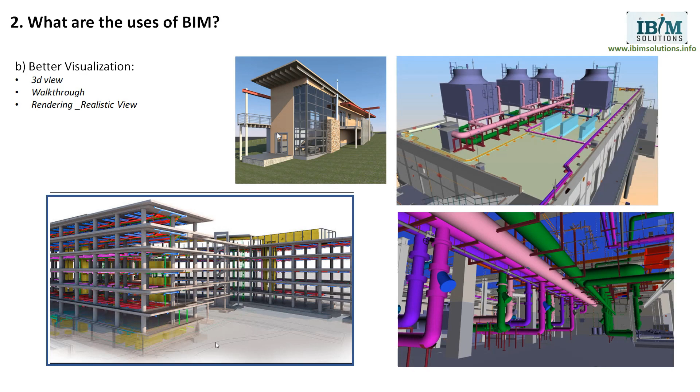We can have a walkthrough through the building to understand how it is constructed, how the equipment is placed there, if any changes are needed. A lot of things can be done with the 3D view. It is always better for us to have a visual impact.

I hope I am audible. I'm getting some voice from the background. I request all members to keep mute. Okay. Team, can you mute all members, or do I need to do that? I'm getting some voice from the background. Okay, fine. So thank you.

Rendering is another feature by which it is easy for us to understand how the building looks. It is good for marketing purposes. We can have a rendering with a much more realistic view. So that is also one of the usages.

We can see here how visualized it is for us, to have a visual impact and to go through this building before it is really constructed. So that gives a feeling of the virtual impact of BIM in the construction industry.

The other prominent use is clash detection. It is mainly a great use for general contractors. Before, we made drawings on a 2D platform, and if we made that a coordination drawing, there was a big chance it might not work on site, because there was no other tool to confirm it is a coordinated file. But since the emergence of BIM, we can use software like Navisworks, where we can detect the clashes.

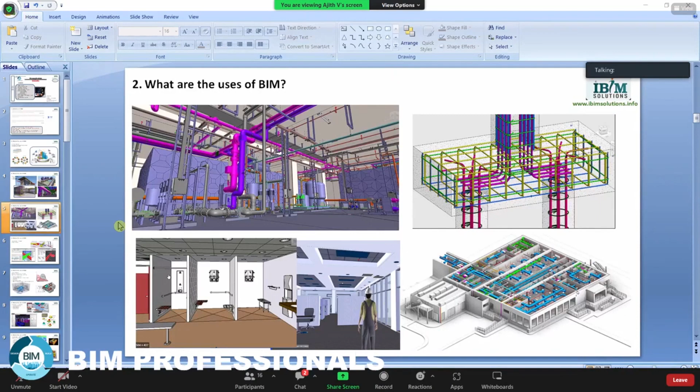So I was talking about clash detection and its advantages. We can detect clashes between a duct and a beam or anything by using software like Navisworks.

Hisham, I'm getting some information like admit. Can I admit members from my end, or will I lose the sharing option? Okay, let me admit, because I'm afraid of losing my screen share. Is my screen shared now? Yes, sir. Fine, no problem. All right, I'll admit members to join, and I think the screen is shared.

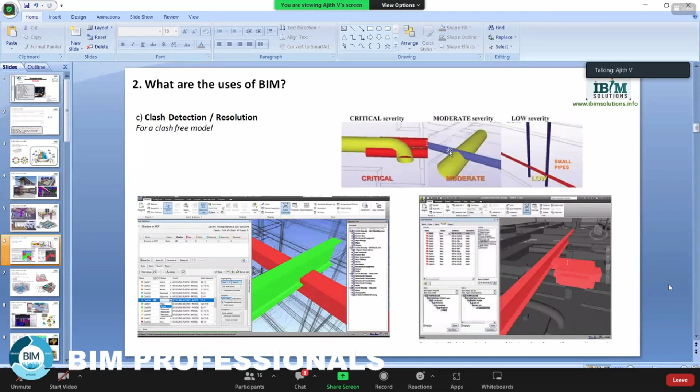Okay, fine. So clash detection is a big advantage for general contractors. They can have a report, they can have a meeting to understand the severity of the clashes, whether critical, moderate, or low, and we can arrive at a solution. That makes the coordination process much easier.

The other use is better productivity. Since BIM is a centralized platform, it relies on the concept of a single source of truth for all building information. The same data we generate for floor plans, we generate for elevations, sections, scheduling and all. They are not different files.

For example, if you remove a door from a building, it will immediately be removed from the relevant floor plans, sections, schedules and all. If you change the design, it will reflect on all the drawings automatically. That is the bidirectional function of BIM. Before, in the CAD process, these files were all different, with no relationship between them. But since the emergence of BIM, it is easy for us, and we can rely on the information.

Because of that, there are fewer RFIs and change orders, because people can have an effective view of the building. And as I mentioned, sections, quantity takeoff, drawings and all are synced. It is the same file. It is cost effective, time effective, and much more reliable information. So it ultimately makes for better productivity.

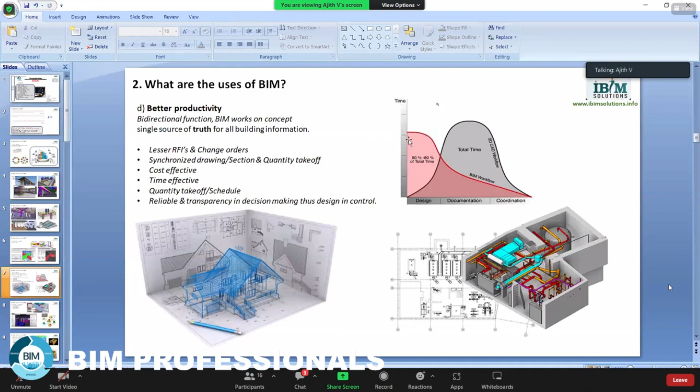For operation and maintenance, it is very good for facility management. They can do good maintenance management, space management, energy management, and COBie incorporation. For those who don't know, COBie stands for Construction Operations Building Information Exchange, which is much needed for facility management. So this information is added to the components.

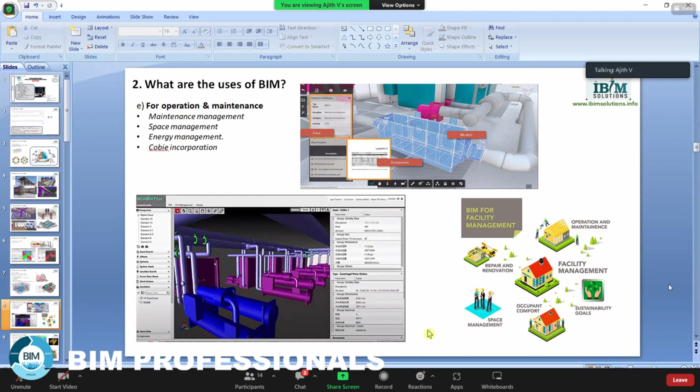So there is a link to information like warranty, manufacturer, and such information which is needed for facility managers. That can be taken from the data. So that makes a facility manager's job much easier. It can be used for space management and all.

For designers, it's a great help because they can get the data from the BIM and analyze it for an energy efficient building, to make a building energy efficient, and for effective usage of material. It gives them more transparency in getting the information, design control with reliable information, energy efficient building, low cost, effective material usage, green building analysis. It helps them do green building analysis for getting a LEED certificate.

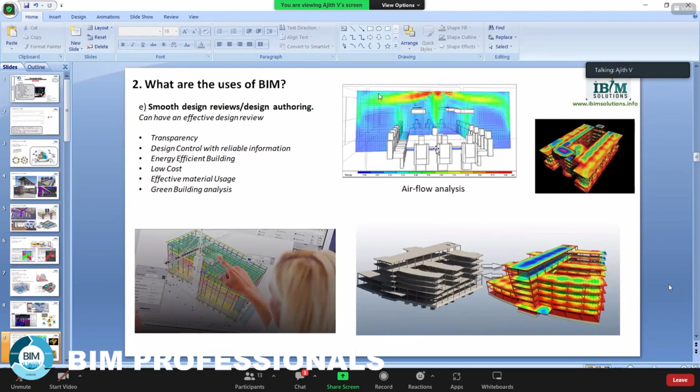So that is much easier for design engineers now, because data flows to and fro with the BIM, by which they can analyze their designs. You can see here airflow analysis, by which they can understand where to put the diffuser, where the hot area is and all. So it's much easier for the design engineers by usage of BIM.

Point cloud: I think in the UK, for the majority of buildings, they have made it mandatory to make them into 3D BIM. A lot of buildings which don't have any floor plans or 3D model can use a laser or sonar scanner, by which a point cloud is generated. You can see in this image, this is generated from the scanner. Then it can be converted to BIM or a 3D model.

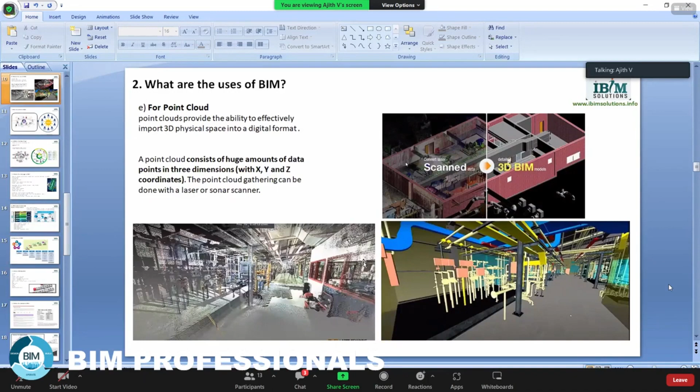That is also called scan to BIM, point cloud scan to BIM, which has great job opportunities nowadays, because a lot of countries have made BIM mandatory, and a lot of buildings which were not done on the BIM platform before can use this technology to turn that building into a 3D model. They can put the laser, get the point cloud, and transfer it to BIM to make a 3D model. So these are the main uses as I understand them.

That means all the members, right from the owner, general contractor, architect, structural engineer, detailer, mechanical engineer, fabricator, site engineer, erector, everyone gets the benefit from BIM. When I am talking about BIM in construction, it is not only restricted to construction. BIM is vast, and it might be there for bridges, large infrastructure, railways and all. Since I am from a construction background, I am just focusing on that area.

All right. So the benefits reach all the members involved in the construction industry, right from the beginning of programming to operation, maintenance and demolition.

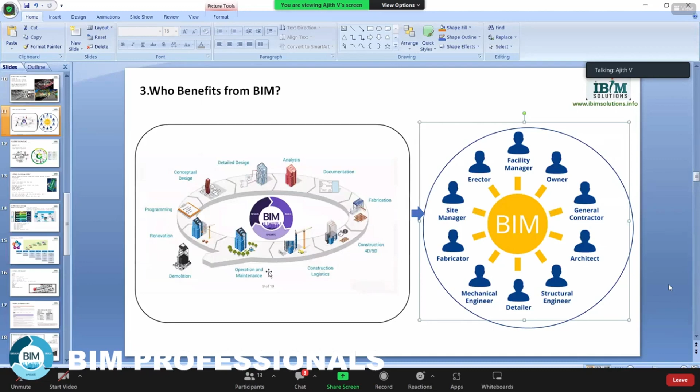There's a question I always hear: is BIM a software? That's a misconception actually. BIM is not a software. BIM is a process or a concept. And there are tools like Autodesk Revit, a lot of software tools like CATIA, Tekla, SketchUp, ArchiCAD. There is a lot of software which helps on the BIM platform. So BIM is a process or technology, and the tools and software are something else. Both are not the same.

For example, CAD. What is CAD? CAD is not AutoCAD. It means computer aided design and drafting. That is a technology, and AutoCAD is a tool which helps with that process. The same way, BIM is a process, and there is software like Revit, Bentley, EcoSim, Tekla, STAAD.Pro, which helps for getting into the BIM platform, which is a tool. There is a lot of software, by the way, so we can learn the software as per our requirement.

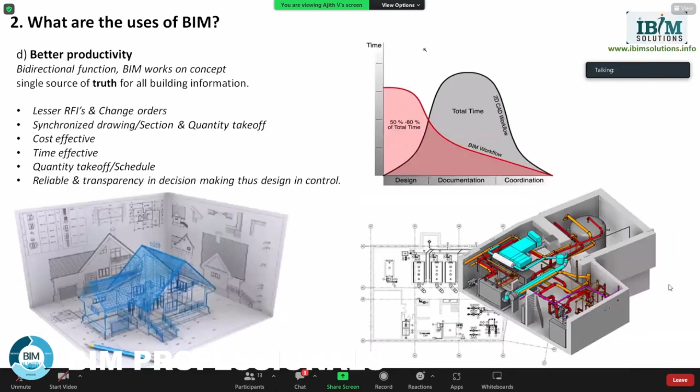Next is the main thing here. Sorry for the slide. The challenges in BIM. Those who are working in BIM will really understand what I'm talking about now.

Challenges. Owners are requesting BIM only because technology vendors have promoted never-ending BIM benefits. It means the owner doesn't actually know the usage, but they just implemented BIM because it was made mandatory by someone or by government terms, but they don't know what the actual scope is.

Let me share one story here from my experience. We made a project with LOD 350, having all clashes coordinated, all information like COBie details incorporated, and added supports and all. At the final stage, for the handover, when I went abroad for a presentation, a member from the design area asked me to zoom to a door while I was presenting that model.

So I thought, why? Anyway, I zoomed to the door. Then he asked me to zoom to the handle. I was surprised, but I zoomed to that handle. And he asked, why is there no screw in the handle? Very tough to deal with such persons, no? It might be needed, but not for this project. For a manufacturing company, that much detail might be needed. But if you do that much detail in BIM for the construction industry, it won't be completed in time. It will take years, isn't it?

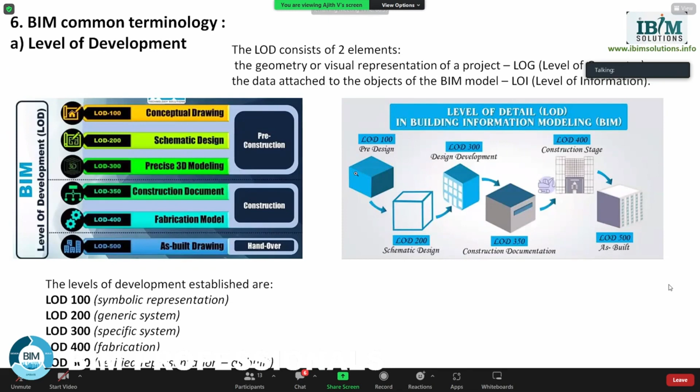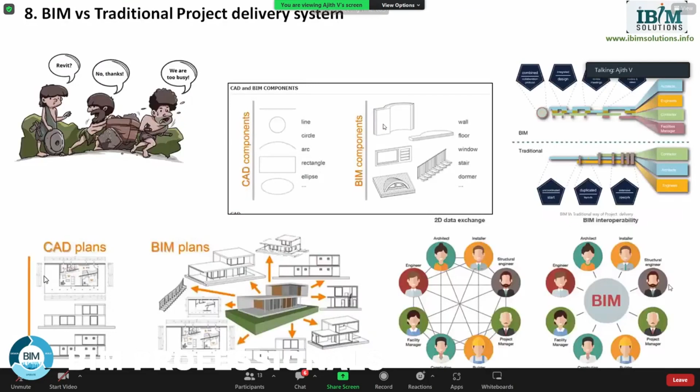Team, is there any time restriction? Yeah, we are conducting this session for 30 minutes. How much time is remaining now? Almost 30 minutes, over. So let me wind up, because there's not much on level of development, dimensions, standards. I think those will be different classes anyway. Okay, better I'll conclude.

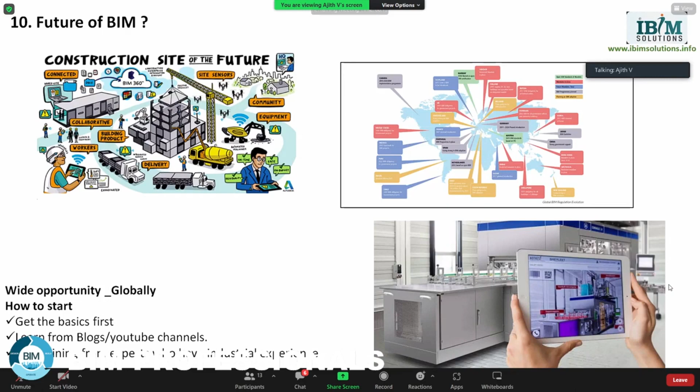The future of BIM is very bright because a lot of countries have made BIM mandatory. So get the basics first, or check blogs, YouTube channels and all, or get training from experts who have industrial experience, by which you can get a job as a BIM engineer, modeler, coordinator, lead, consultant, manager. Lots of work is available. They are getting good salaries also. You can Google it and see the great salary packages they are getting in India as well as abroad.

Since time is restricted, I'm not going in depth on all those, but you can use this material as a guideline, a roadmap for understanding BIM. Thank you all, and I'm concluding here. I'll be able to attend any questions now.